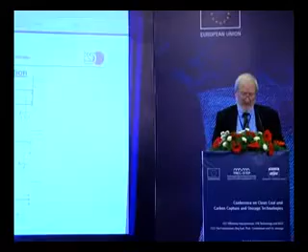The middle one here is a biomass gasifier, either by oxygen or by steam, and you have a gas cleaning and use this as additional fuel in a coal-fired boiler. And the third one is the lower one, where you have a biomass washing, for example to reduce the nitrogen content, the sodium content, and you can use that as additional fuel. So all these three possibilities are available in industry.

Comparison of investment costs at about 2000, when this research was very high in Europe. Therefore it's given here in German marks per kilowatt electrical. That was before the euro, but in those days we had a lot of plants operating. For example, the red ones here are the biomass-only plants, small-scale boilers at three different locations; below are the names of the locations. They used only biomass, and you see here the investment costs, compared to the blue ones.

Those are boilers where the first one is the Dutch one, the second one is the Danish one, the Irish one, then an Austrian one, and then a summary of straw plants or wood plants. And you see that the investment costs to use biomass in addition in a boiler are much less than a plant dedicated only to biomass. So we can leave this now.

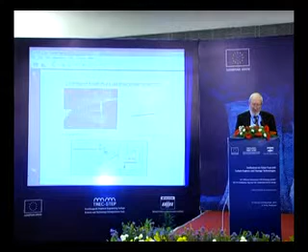Then you have a shredder machine, followed by a transportation system, in particular for sieving any kinds of sand and contaminants from the straw. And this was then further transported pneumatically toward the actual boiler.

And you see here one of the typical combined straw and coal burners from those days. You have the straw primarily fed in the center. You have an oil burner here for ignition. You have the coal in the annulus around the straw, and the air everywhere as secondary air, as usual.

There is another possibility which was investigated in detail. There's a co-combustion of SRFs, so solid recovered fuels. That means from garbage and industrial waste, by treating those in terms of milling or sizing and separation, to have a higher degree of biomass in this final blend. And this was used here in the Weisweiler power plant, the lignite power plant in Germany.

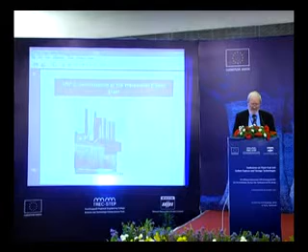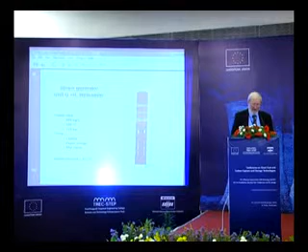And this fuel, which was in addition fed to the normal lignite-fed power plant, was paper sludge, and these are SRF. The boiler efficiency with this combination of about 3 up to 5% of the additional paper sludge and SRF came up to close to 90%. Here's the steam data. You see it's one of the older 600 megawatt units at subcritical pressure.

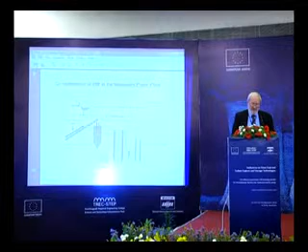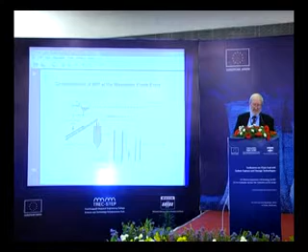And here is a scheme of how this was done. The fuel was transported via a bunker, the yellow part here on the left bottom. Then we have a transport conveyor into a separate bunker, fed into the coal mills, here in the lower part. Both are milled together and then transported and burned in the boiler. Tomorrow I will give you some more details about this one.

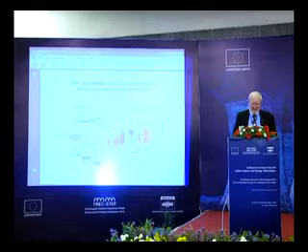Another one used the same types of fuel as well as sewage sludge in co-combustion mode in CFBs, two CFBs with 235 megawatts thermal capacity each. And you see here the scheme. On the top left, the pre-dried sewage sludge is transported and fed below the downcomer into this fluidized bed, and the same applies to the SRF fuel in a separate bunker system, also fed into the lower part of the fluidized bed. The main fuel obviously is the run-of-mine lignite, with about 90 up to 95% of the total and 5% with the additional biomasses.

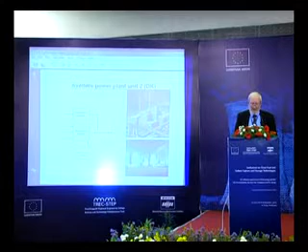Another example is the Avedøre plant in Denmark, where we have two separate boilers. So we don't feed the biomass in the same boiler. This is the center one here, the main boiler, a large unit originally built for coal, later changed to natural gas and oil, including in the years after that some wood pellets, and in the parallel boiler we had the straw boiler. Both produce steam into a steam turbine for electricity on one side and district heating on the other side. So a large Danish plant.

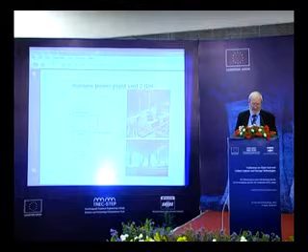In the photos you see an aerial view of the total plant, and in the lower one the big vessel is the biomass vessel for the straw. This plant also has a natural gas turbine in parallel. You see all the various different fuels that could be used in this Danish plant. The only indigenous fuel in Denmark is straw. Everything else has to be imported. So therefore, it is understandable that we tried all the fuels available.

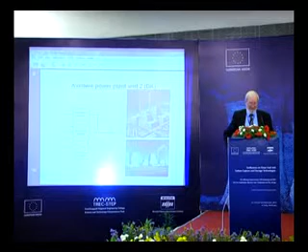So then let's talk about gasification, co-gasification. Historically, we know that the thermal decomposition of solid fuels, wood and later coal, was used for lighting, heating, and cooking. More recently, steam, air and oxygen supported gasification for power generation or for motors and turbines. And we also had the combination with additional gas conversion processes for the production of liquid fuels and feedstock for chemical plants.

So, why biomass gasification? Obviously, you see here the partial utilization of biogenic fuels in large-scale power generation. Some examples will come. And as I said earlier, if you have this gasification in a separate unit, there are no restrictions on the main boiler operation as well as the availability by the biomass system. And this is important. We heard that from John. The utilization of ash is very important.